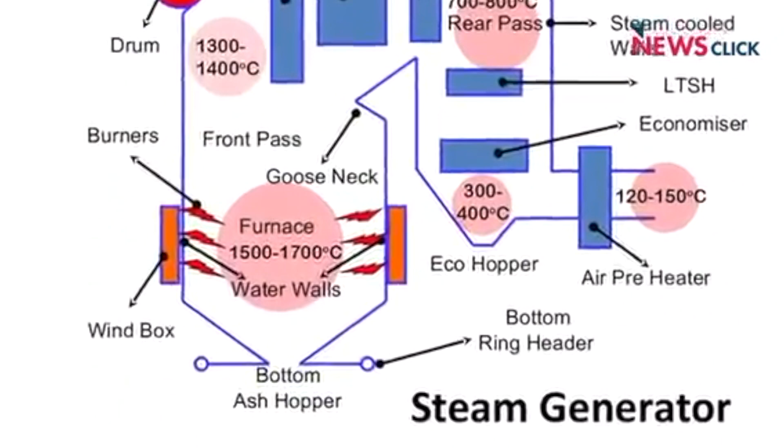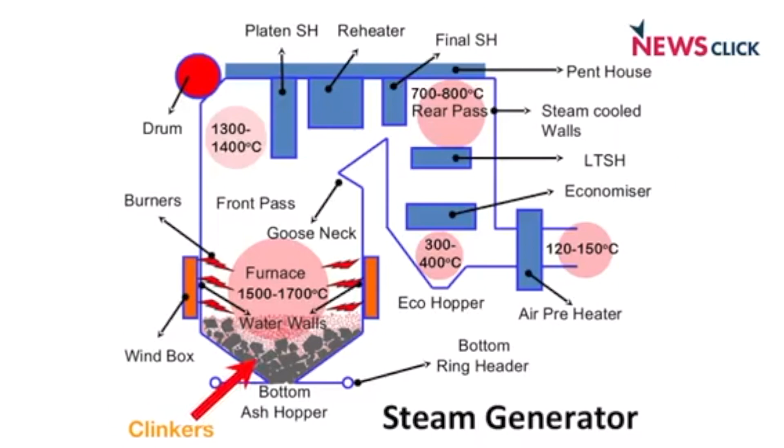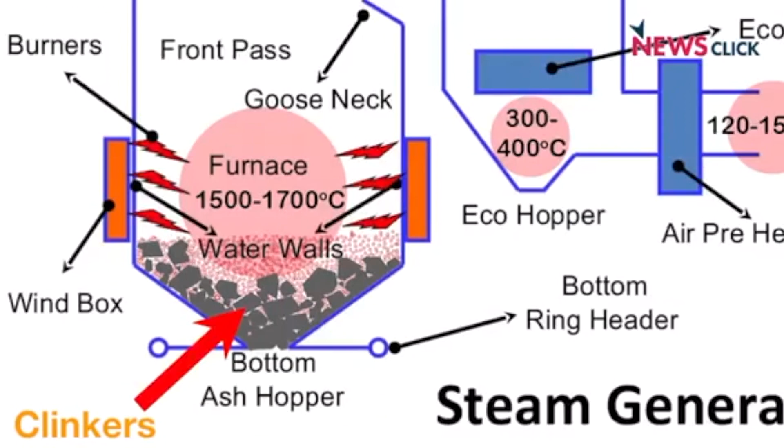This is a boiler, and this is the bottom ash handling system, from where the non-combustible residue is released as hot ash. According to sources, there was a problem of clinkering taking place in the boiler. Clinkering is when the ash becomes solidified, almost like blocks of cement. The clinkers choked the bottom ash hopper, leading to a huge buildup of ash inside the boiler.

As a result, the pressure inside the furnace started increasing. So, the NTPC officials tried to bring down the load. At the same time, they attempted to remove the clinkers manually by inserting steel rods through the manhole doors and the bottom ash hopper, a process known as double poke.

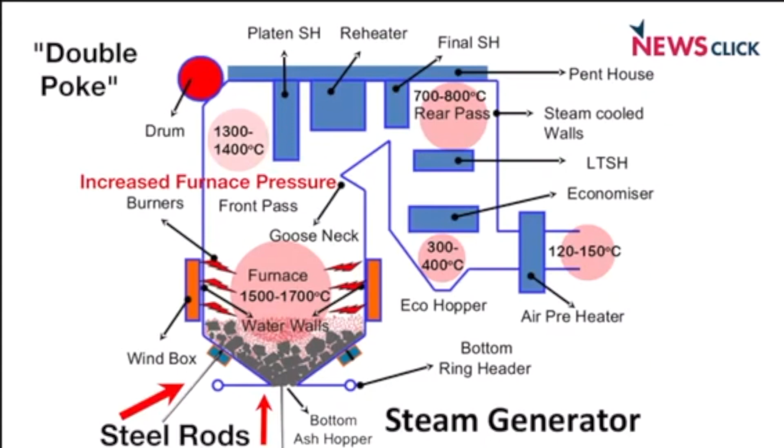It is crucial to note here that, at this point, it appears the NTPC officials bypassed the boiler protection by disabling the master fuel relay trip, which cuts off fuel supply when the pressure gets very high, because they wanted the boiler to keep running.

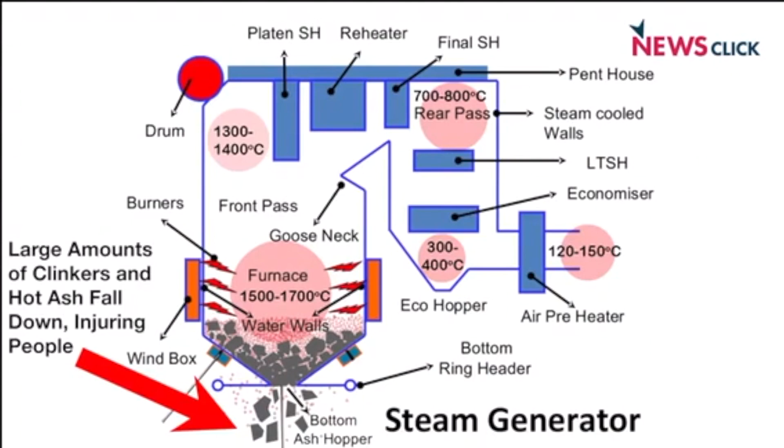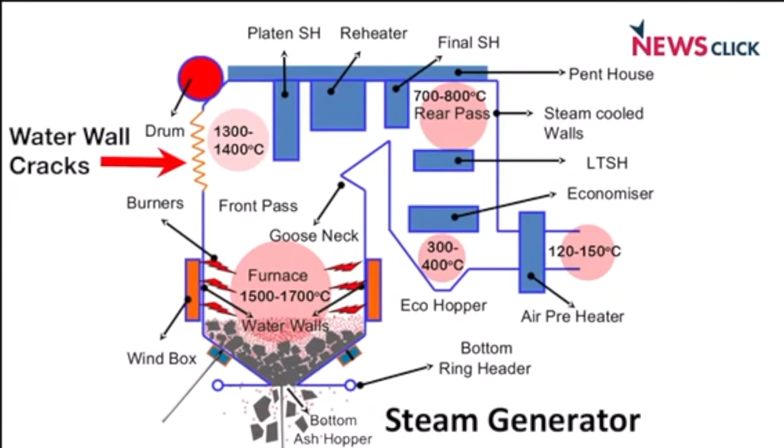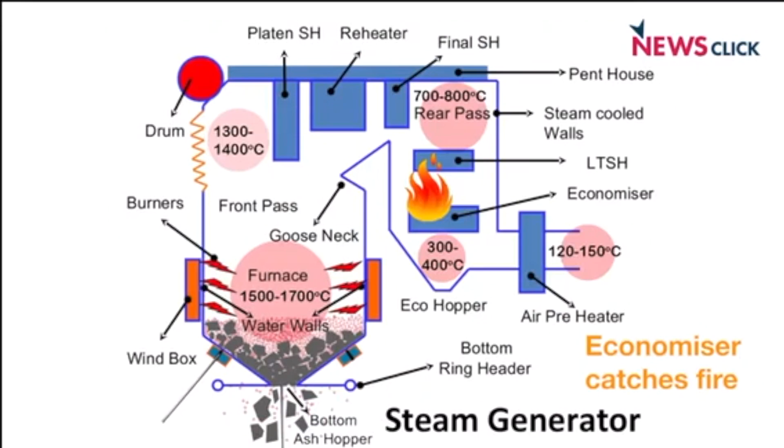As a result of the double poke, a huge mass of clinkers fell down, creating unstable conditions inside the boiler because of large pressure fluctuations. This led to the water walls being cracked, and unburned coal particles got carried over to the rear pass of the furnace. In the rear pass, the unburned coal particles caught fire, leading to an explosion in the economizer.

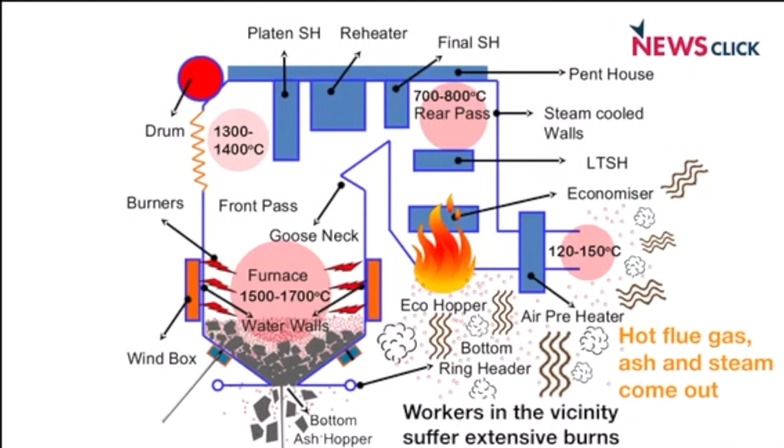Hot flue gas, ash, and steam came out of the economizer area, causing extensive burns to the 300-odd people who were working in the vicinity of the boiler. Why was the boiler protection bypassed? Why were there so many workers around the furnace? Is it because work on the unit was still pending, as sources say? Why was the unit put under commercial operations when it was not yet ready? Only the NTPC has the answers.

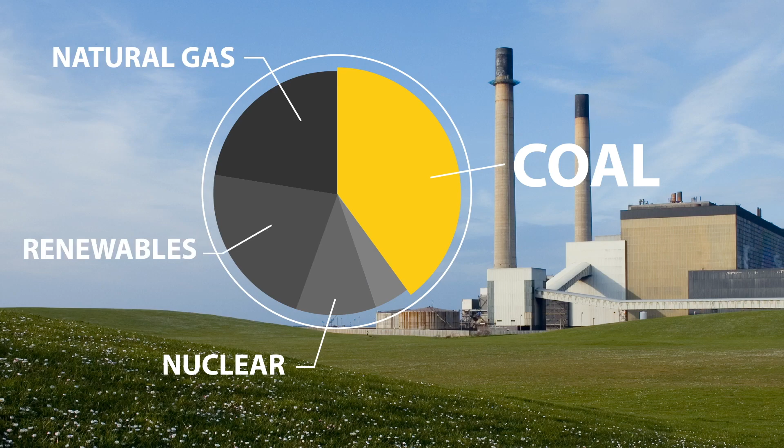When we think about reducing emissions, we often think about renewable technology, but advanced coal technology might be even more important. Coal remains the world's leading fuel for electricity production, and like other industries, today's coal technology is far better than it was a few decades ago. Advanced technologies that are available today, including high-efficiency, low-emission coal technologies, can greatly improve the efficiency of coal plants. And that's a big deal.

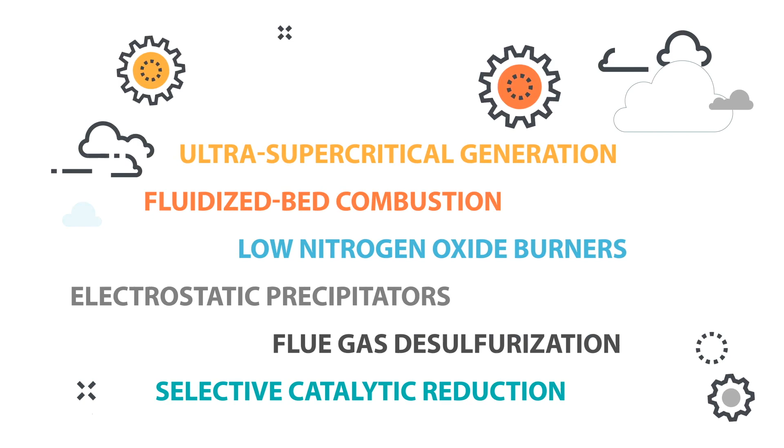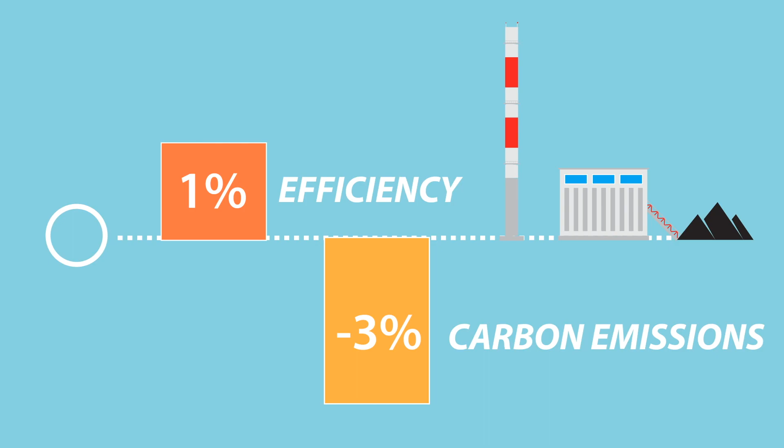As efficiency at coal plants goes up, meaning how much power they can produce from a ton of coal, emissions of carbon dioxide go down. Just a 1% improvement in the efficiency of a conventional coal plant results in a 2 to 3% decrease in carbon emissions. Thanks to investment in technologies like scrubbers, today's coal fleet is already far cleaner than it was. U.S. coal plant emissions have plummeted 91% since 1970, even while coal consumption jumped.

We can do even more if we encourage the further deployment of advanced technologies. Take the Prairie State Energy Plant in Marissa, Illinois. It's outfitted with a range of advanced technologies. They remove 85% of nitrogen oxide, 98% of sulfur dioxide, 99% of particulate matter, and 90% of mercury. And because the plant is more efficient, it uses less coal to produce even more power.

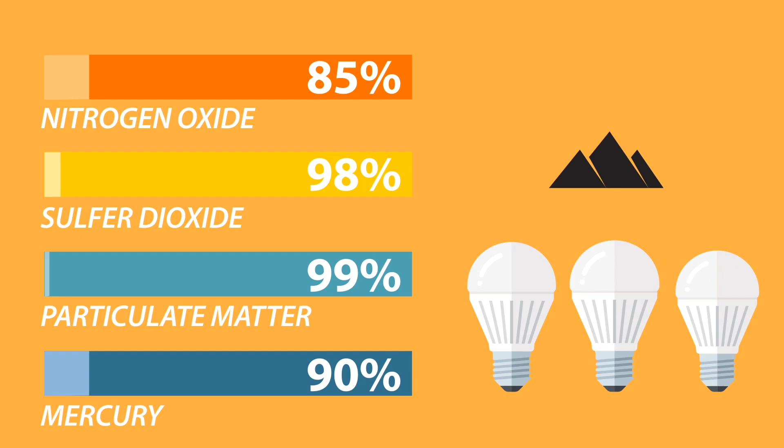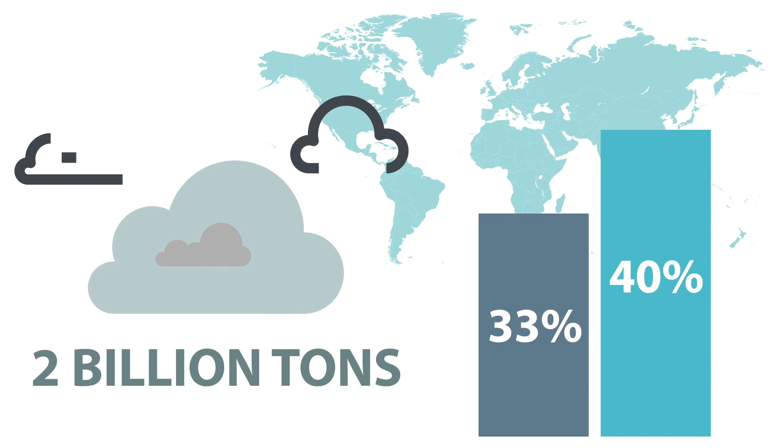More advanced coal plants like this facility could make a difference here and here. If we improve the efficiency of the global coal fleet from its current level of 33% to 40%, achievable with existing off-the-shelf technology, annual carbon emissions could fall by 2 billion tons. That would be a carbon emissions reduction equivalent to all of India's annual emissions.